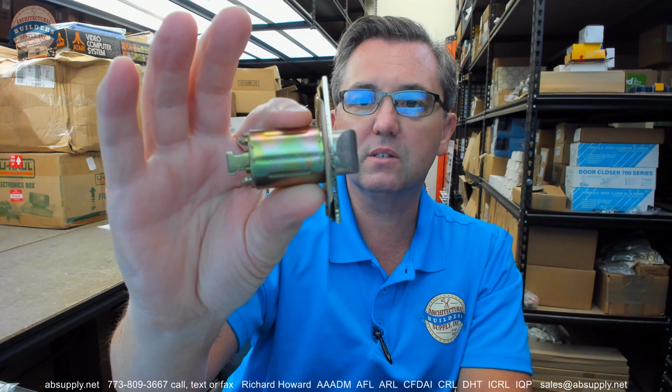This video is to bring you a closer look at the Arrow R20. This is a replacement latch bolt. I can tell that this is a 2 3/8 latch bolt. It has this sleeve over it, which allows the latch bolt to sit more firmly inside of the hole when you've drilled a 1-inch hole; that is the role of that. If you've drilled a 15/16 or a 7/8 hole, you wouldn't use that.

This is a listed product. It's also labeled. It's listed, meaning the testing laboratory, in this case UL, Underwriters Laboratory, has at some point tested this and found it to be compliant with fire-rated applications. It's also labeled, which means it bears visual proof of that testing and that listing. It's also on the face of the latch bolt, which is nice because if you're doing a fire door assembly inspection audit, you don't have to remove the hardware to see that it has the UL mark on it.

It also has a capital letter F. You will find lowercase f's and capital letter F's. Lowercase f's are neutral pressure. Uppercase F is a positive pressure indication. Fun fact. This is 2 1/4 tall.

Okay, it's 1 inch wide, and 1 inch wide and 2 3/8 backset very much go together. It's pretty uncommon to find a 1 1/8 wide 2 3/8. Did I say 1 3/8? Whatever. 2 3/8 backsets are going to be almost 1 inch wide. 1 1/8 wide, you're looking at 2 3/4. Nowhere on here does this measure 2 3/8.

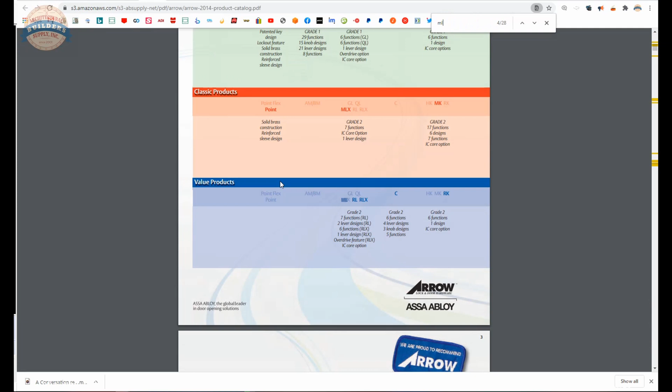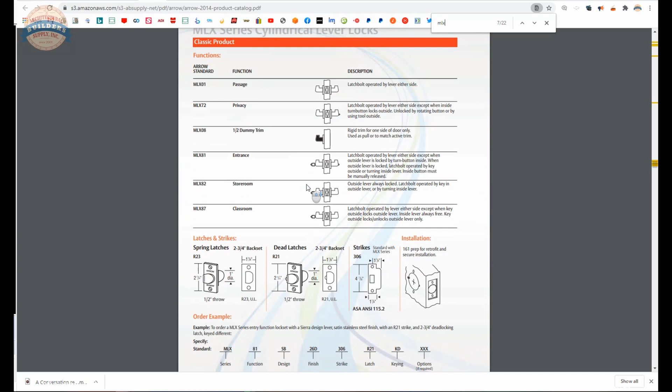I don't know that I would expect to actually find it listed. Unfortunately, I see the Arrow catalog is both quite out of date and a bit anemic in having all of the data that I'd like to see in a catalog. For instance, they don't even have an R20 listed in the 2014 catalog, which in 2020 is the most current book we have.

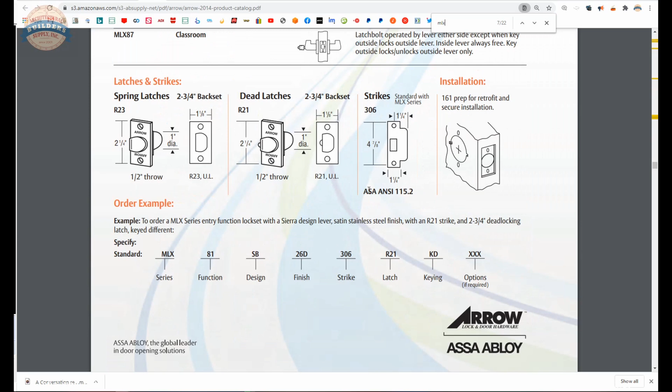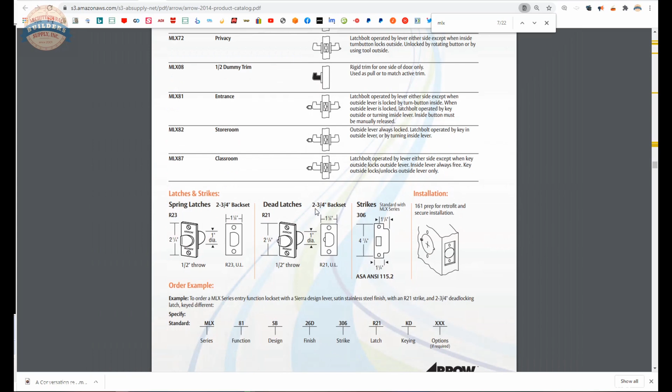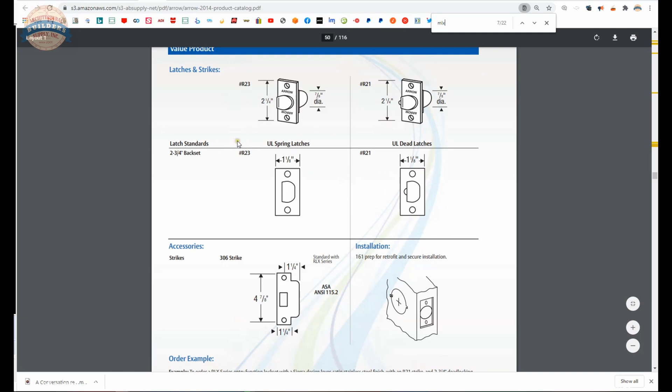You see what I'm saying? We're in the MLX section, which they say this works with, but they don't list a 2 3/8 latch bolt for this. The RLX, again, not listed in the catalog, which is awfully strange.

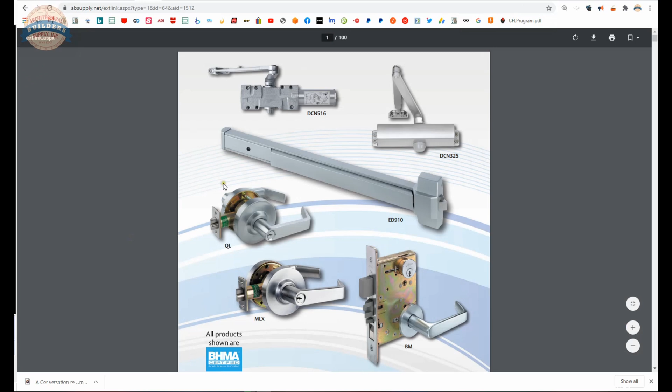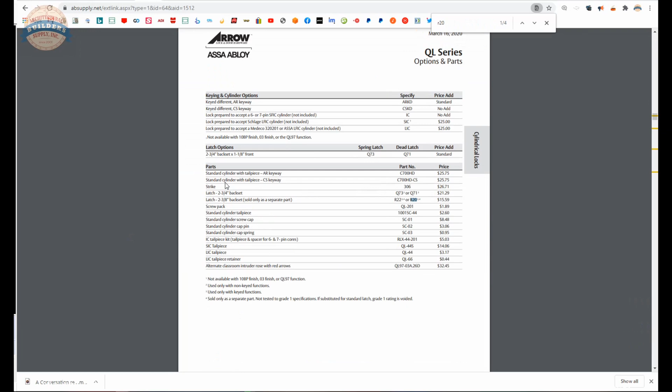Now, what happens generally is you'll find information in the price list, and the price lists are pretty up to date. So as I fire up the price list, we'll do a find function for R20, and we'll indeed find it listed here, and other series actually that it's compatible in. So it shows up as an RLX option, a QL option, an HK option, and then an MLX option.

Alternate 2 3/8 backset, 1-inch front, sold only as separate part. R20, which, I've never encountered a lock manufacturer who won't supply you with a 2 3/8 latch at a no-charge substitution. Arrow clearly does it that way. So if you need 2 3/8 and you're ordering a new Arrow lock, you'll be ordering technically 3 line items. The lock, the cylinder, if there's a cylinder involved, would be a second line item on its own, and then a 2 3/8 latch.

Use only with keyed functions. So there could be something about the non-keyed functions that are not compatible with a guarded or a deadlocking style. So be mindful. They're literally telling you not to use this with a spring latch, a privacy or a passage, or an exit lock for that matter, if they even make an exit lock in those series of locks, which they probably don't, would be my guess. Yeah, they don't. Passage, single dummy, privacy, entrance, office, storeroom, classroom, and then asylum.

Yeah, so I'm partial to Arrow because I am familiar with the product line, and, being from Chicago, if it's not a Schlage lock, it's very likely an Arrow lock that your customer's coming in with, so they're really everywhere. But you'll notice that sometimes you really need the price list to go along with the product catalog to find all of the options.